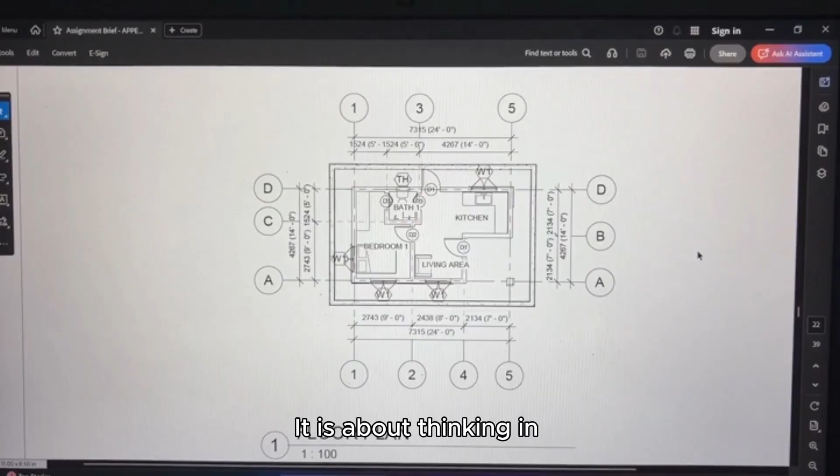Digital construction is not just about drawing, it is about thinking in data, objects, and information. This video shares what actually happened next, how our digital skills evolved, what challenges we faced, and how we slowly turned that spaceship dashboard into a useful tool for design and decision making.

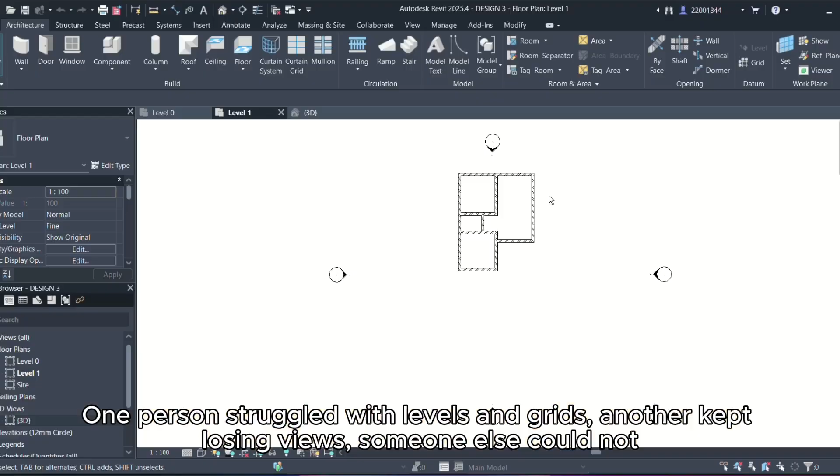At first, confusion was our default setting. Individually, we could start on different things. One person struggled with levels and grids, another kept losing views. Someone else could not remember where to change materials. Even simple tasks like creating a clean floor plan felt like solving a puzzle with missing pieces.

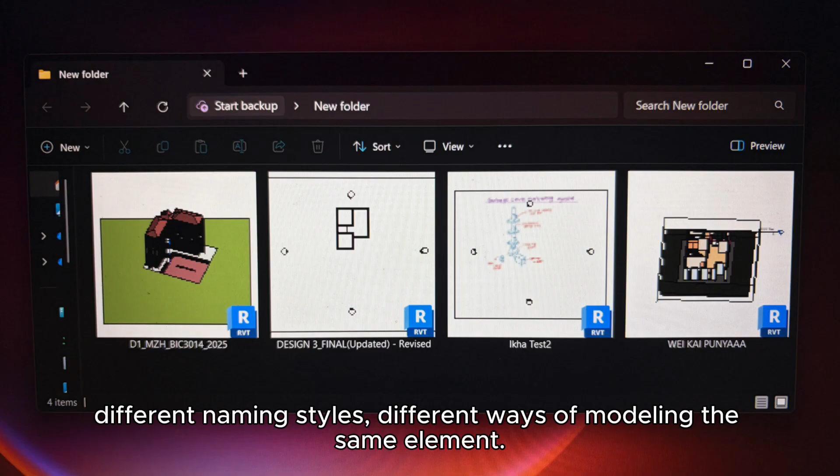As a group, our files looked like different languages, different naming styles, different ways of modeling the same element. That is when we realized our first big lesson: without shared standards, a digital model becomes digital chaos, no matter how good the software is.

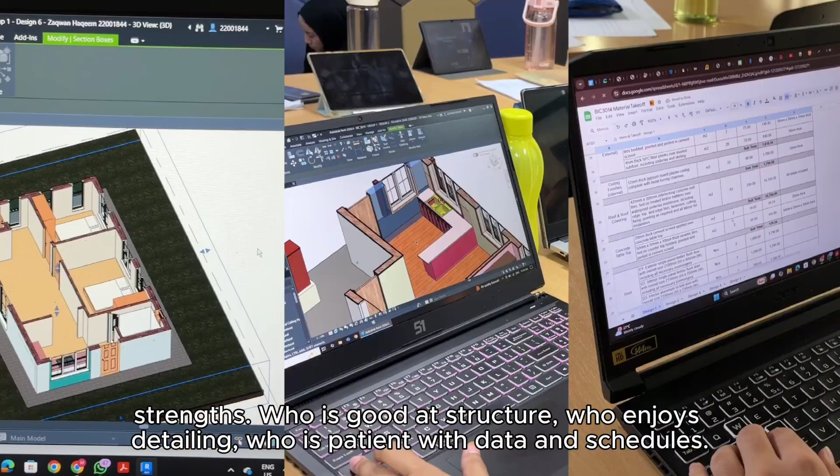To break out of that chaos, we stopped relying on random trial and error and started treating the process like a strategy. We divided roles not just by tasks, but by strengths: who is good at structure, who enjoys detailing, who is patient with data and schedules.

We had short focused discussions where we opened the same model and agreed on one way to name, organize, and present information. When someone discovered a useful trick, like a smarter way to control visibility or create schedules, that person became the mini trainer for the rest of the team. Slowly, our individual challenges turned into shared knowledge, and the model began to look less like an experiment and more like a coordinated digital building.

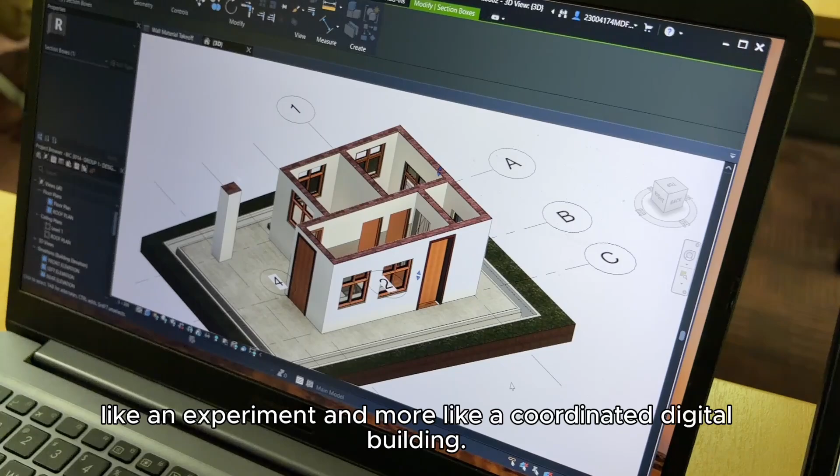At some point, something changed. The model started talking back to us. Not literally, of course, but through data. When we updated elements, schedules adjusted. When we changed materials, quantities shifted. We could actually see how a single design decision affects the information behind it.

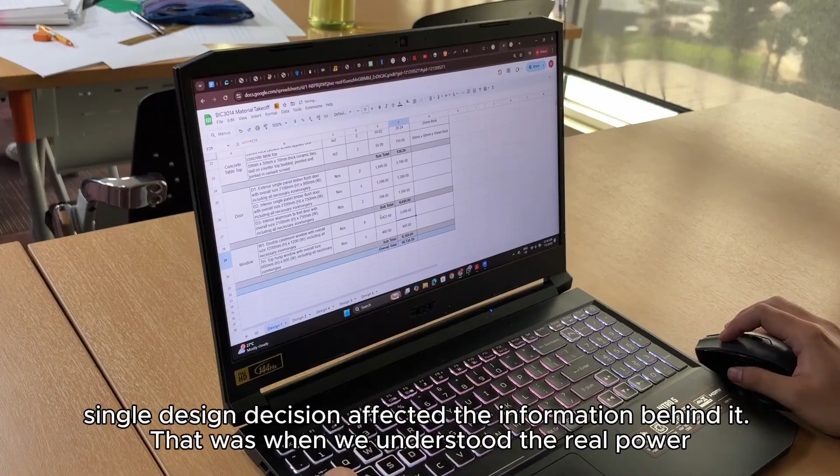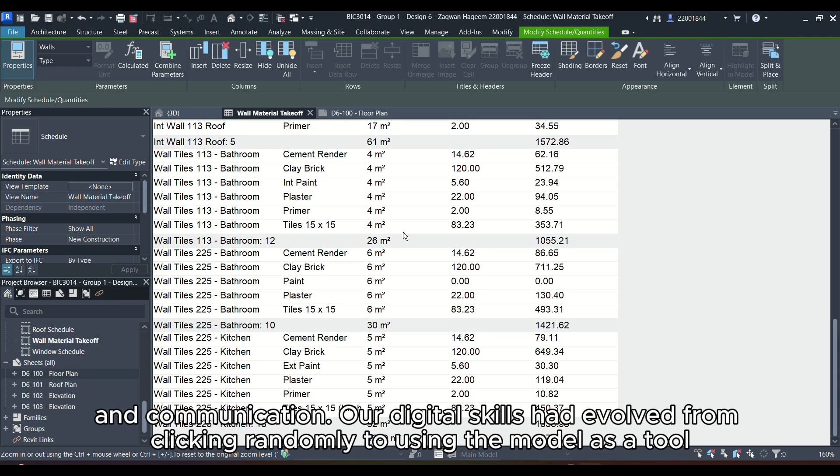That was when we understood the real power of BIM. It is not just a 3D picture, it is a database with geometry, supporting cost, planning, and communication. Our digital skills evolved from clicking randomly to using the model as a tool for asking better questions and making better decisions. Looking back, the toughest part wasn't just technical.

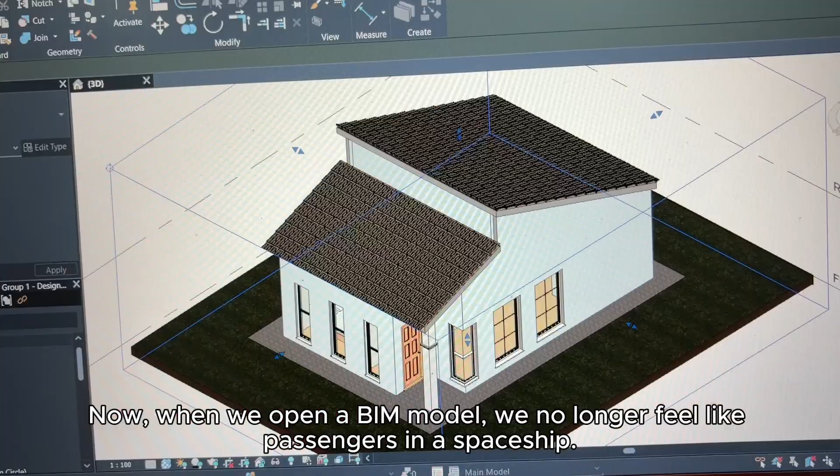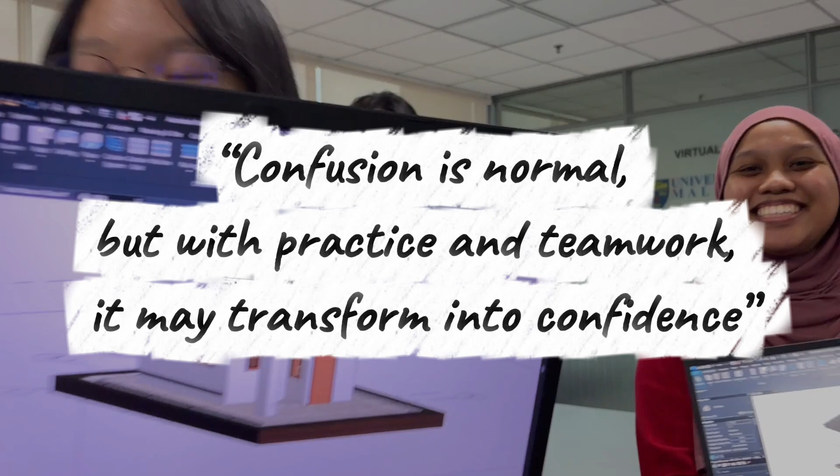It was learning to communicate, coordinate, and stay calm when the model did not behave the way we expected. Facing those challenges taught us to pause, review, ask, test, and improve. Now, when we open a BIM model, we no longer feel like passengers in a spaceship. We feel more like co-pilots ready to use digital tools to support real projects, real costs, and real decisions in construction. For anyone starting out their BIM journey, remember, confusion is normal, but with practice and teamwork, it may transform into confidence.